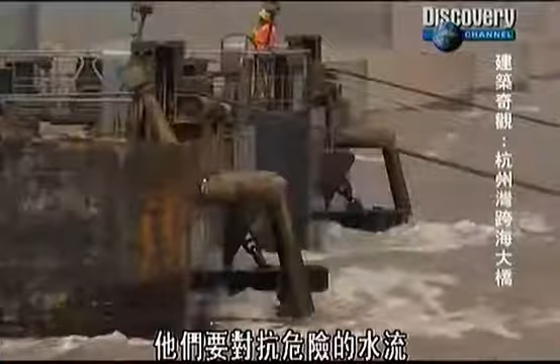These may look like relics of the past, but they are actually the stepping stones to a modern-day marvel. The longest bridge of its kind on Earth, and the team has just 5.5 years to build it. They'll have to battle dangerous currents, winds in excess of 170 kilometers an hour, and take on the Silver Dragon. To make the construction even more difficult, this bridge isn't spanning a river, it's spanning an ocean.

China's Hangzhou Bay Bridge is the ultimate design and engineering challenge. A monster project with monster machines, and a construction zone like no other. If they succeed, it will be a man-made marvel. The dream, to bring two of China's busiest cities closer together. The two cities sit on either side of the Hangzhou Bay, a giant gulf in the East China Sea.

On the south side of the bay lies Ningbo Port, the second busiest in China, with a handling capacity of more than 100 million tons. 350 kilometers away is Shanghai, the economic and financial hub of China, growing faster than any other city on the planet. Ningbo's future as an international shipping center will be fast-tracked if it can be linked to this dynamic and thriving metropolis.

To make the dream a reality, engineers are designing the world's longest transoceanic bridge across Hangzhou Bay. The 6-lane bridge will cut the distance between Ningbo and Shanghai by more than 120 kilometers. But between these two mighty urban centers lies a vast stretch of ocean that until now has been beyond the reach of bridge builders.

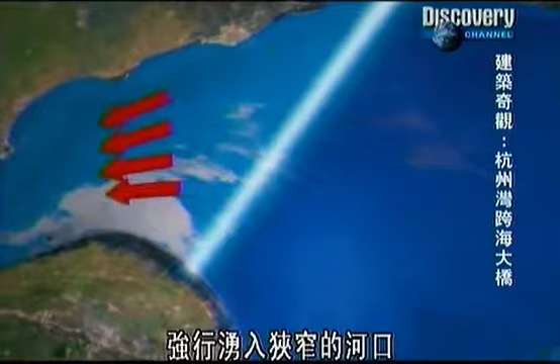At a total cost of nearly 12 billion yuan, the bridge represents the future of the region's economy. But a freak force of nature could see the dream over before it's even begun. Hangzhou Bay is home to the Qiantang River tidal bore, a giant wall of water that forms when extreme high tides, carried on the strong currents from the bay, force their way into the narrow river mouth. The power of this water is so great, it causes the river to flow backwards and produce the giant wave. The Hangzhou Bay tidal bore is known as Silver Dragon, and every year, in the middle of the 8th lunar month, it wakes up.

Reaching speeds of 40 kilometers an hour and heights of up to 9 meters, it's the largest and most spectacular bore in the world. And every year, hundreds of thousands of tourists come for a front row seat. But this natural wonder is unpredictable and dangerous. To date, the mighty dragon has claimed the lives of at least 100 people. And this remarkable phenomenon could claim the bridge before it's even started. In a bizarre twist, it's not a case of if the bridge can survive the dragon, but can the dragon survive the bridge?

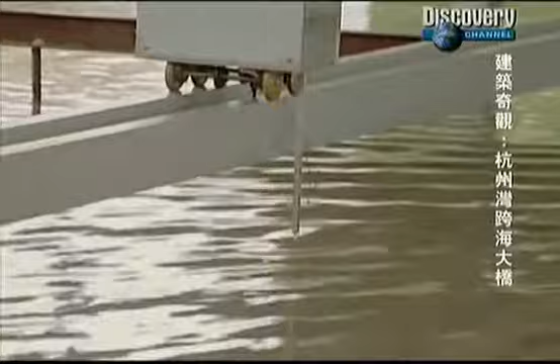Before the designers can begin, hydrologists need to know what they are dealing with. The bridge could alter the flow of water through the bay, destroying the Silver Dragon and a multi-million-dollar tourist attraction. They undertake extensive studies of the Qiantang River's flow, as well as the tides and currents in the bay, then replicate these findings with a scale model of the bay, complete with a prototype of the bridge. The current for the model and the actual current are very similar. The experiments give us results on the effect of the tide and direction of water flow. From these experiments, Jiang works out exactly where the foundations must go to minimize the bridge's effect on the currents.

The result is a bridge in harmony with the currents. 36 kilometers long, winding out in a giant S shape across Hangzhou Bay. This will enable the water to run smoothly under the bridge, minimizing the impact on the hydrology and the tidal bore. The S shape won't interfere with the yearly dragon tide, and it will have another life-saving benefit.

If you make a straight bridge, a long bridge, all the driver sees is a black tarmac in front of him. And that can be quite monotonous. In fact, it can be downright dangerous because of sheer boredom of driving a long length. After 10 years of planning and more than 50 separate studies on environmental conditions, the design is complete. The world's longest transoceanic bridge gets the go-ahead.

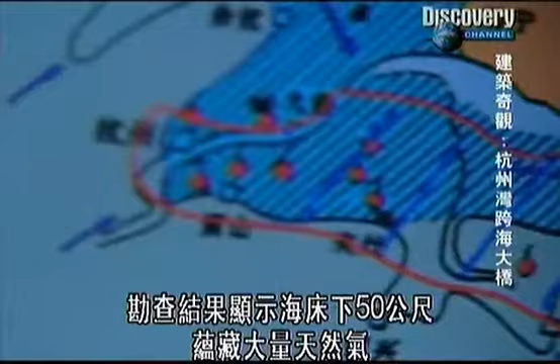But constructing a 36-kilometer-long bridge across this turbulent sea won't be easy. Before construction even begins, the team finds out that Hangzhou Bay harbors an explosive secret that threatens the future of the bridge. Surveys reveal large natural gas deposits 50 meters under the ocean floor, right in the path of the bridge. When planning the bridge, we never considered the possibility there would be natural gas here.

The bridge design calls for thousands of steel piles to be driven almost 80 meters down into the sediment. But with a minefield of natural gas below the seabed, it's a recipe for disaster. My first reaction was maybe this was not a suitable location to build a bridge. Driving piles into the gas deposit is extremely hazardous. The uncontrolled eruption of gas could undermine the bridge's foundation.

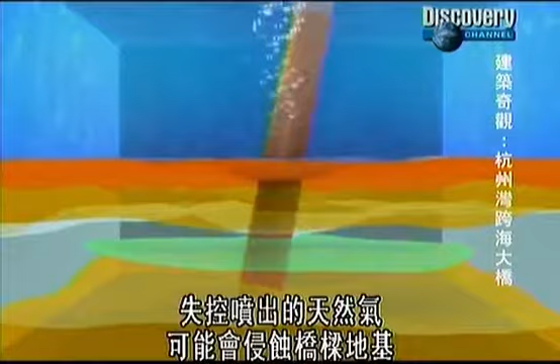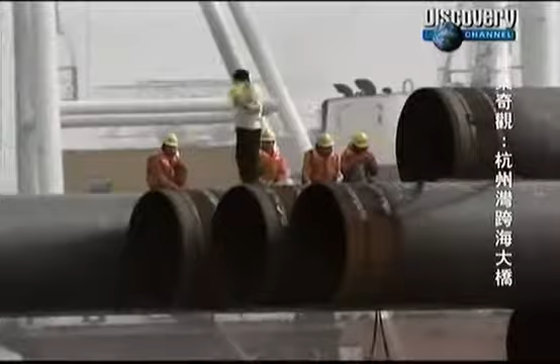A stray spark could ignite the gas and fuel a catastrophic explosion. Each time the team drives in a pile, it could spell disaster. Construction is put on hold until they can find a solution. We were very worried. If, say, the natural gas problem couldn't be overcome, it would then bring harm to our construction and also the lifetime of the bridge.

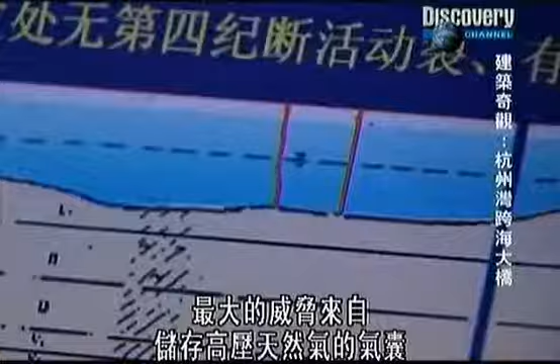The greatest threat comes from pockets of gas that are stored at the highest pressure. These pockets can pop like a balloon, erupting with devastating force. But after careful analysis of the gas field and consultation with leading experts, engineers come up with a solution. We call it controlled gas release. We pick the most concentrated areas of the gas. Then we drill holes down there, releasing the gas.

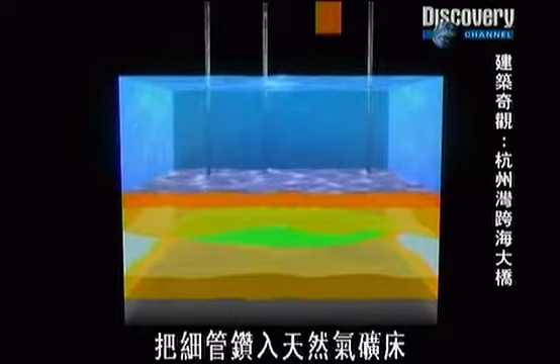Small pipes are drilled into the gas deposit and fitted with pressure valves. The gas is slowly released until the pressure is low enough that the gas no longer poses a risk to the bridge. It's an ingenious solution that enables the engineers to go through the minefield, not around it. And the project is back on its feet.

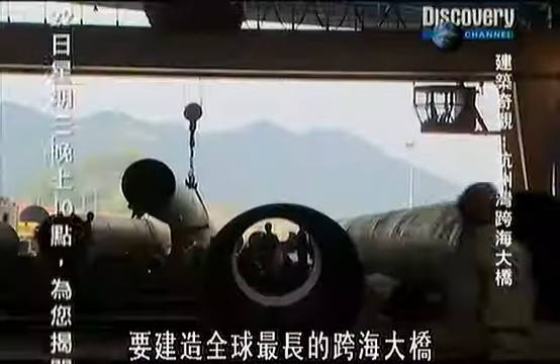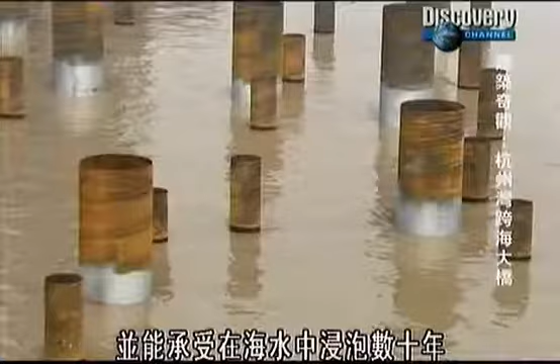To build the world's longest transoceanic bridge, they must first drive 6,000 steel piles into the seafloor. For the foundations of the bridge, we mainly depend on the steel piles. The steel piles for the bridge foundations are not replaceable. Each pile must stand up to being hammered 80 meters into the rocky seabed and endure decades of exposure to salt water. It's a tall order, and there's no room for failure.

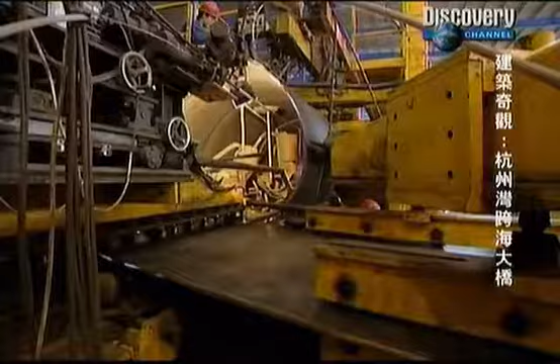To ensure success, they decide to custom build special factories near the construction site to make these extraordinary piles. Here, sheets of steel, 22 millimeters thick, are rolled into giant tubes, 1.5 meters wide and almost 90 meters long. Each tube is arc welded twice as it forms. First from the inside and then from the outside. They use a special copper-plated alloy to weld the steel together.

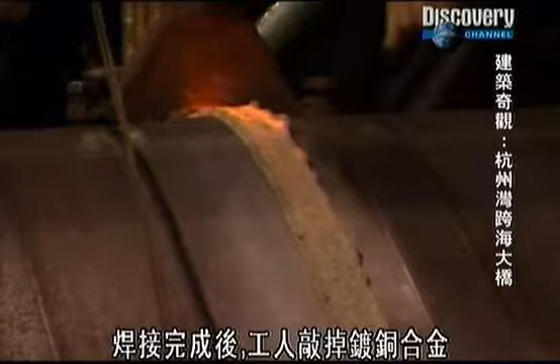Copper is a good conductor. It increases the temperature of the welding wire. When finished, the copper simply cracks off. Weighing in at close to 70 tons, each colossal pile takes 40 minutes to roll and weld. These are the longest and strongest steel piles ever used in a construction project in China.

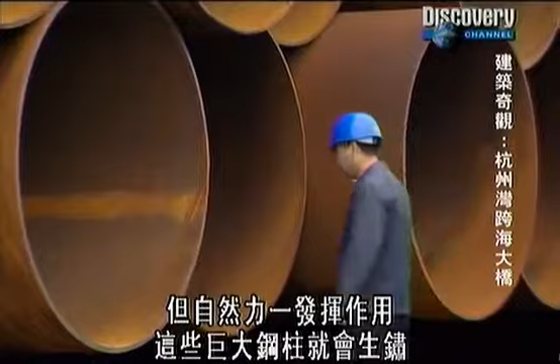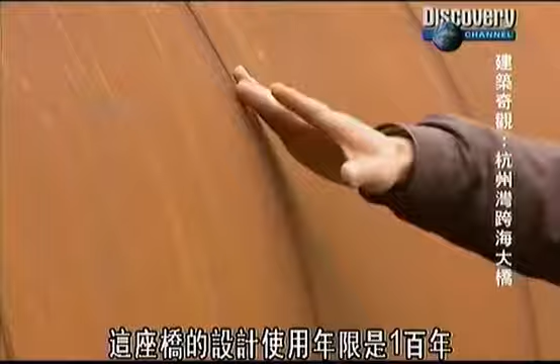But these mighty steel pillars will be reduced to rust and rubble if nature gets its way. The piles stored on shore are rusting before they even make it to the water. For this particular bridge, its design life is 100 years. What that means is the material that we use should be able to last 100 years with the least amount of maintenance and the least amount of inspection.

For the piles to last the test of time, the team must protect the steel from the elements. The process is costly and time-consuming. First, the piles are run through a machine that blasts the rust from their surface. Then they continue into another mammoth machine that coats them with an anti-corrosive preparation called fusion-bonded epoxy.

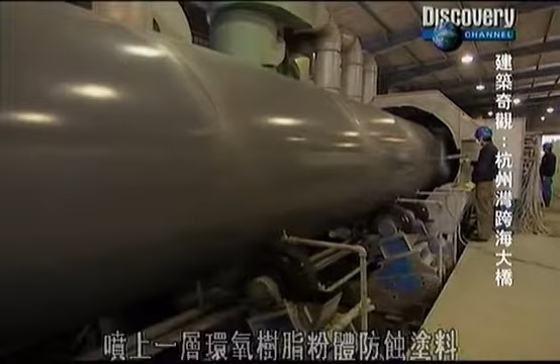To seal in the epoxy, the coating is heated to a sizzling 250 degrees Celsius. The temperature is crucial. Any significant drop and the seal will fail. Workers must constantly check the temperature using infrared sensors. But the team is confident that the piles are now ready for whatever Hangzhou Bay throws at them. The steel piles designed by us will last for 100 years.

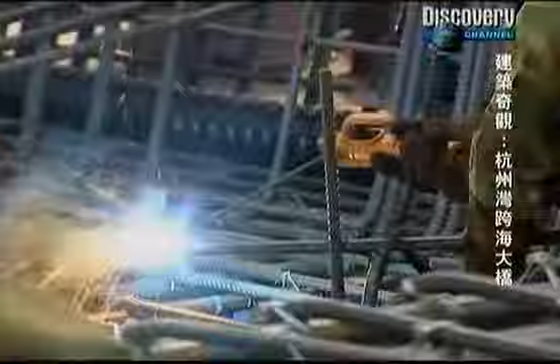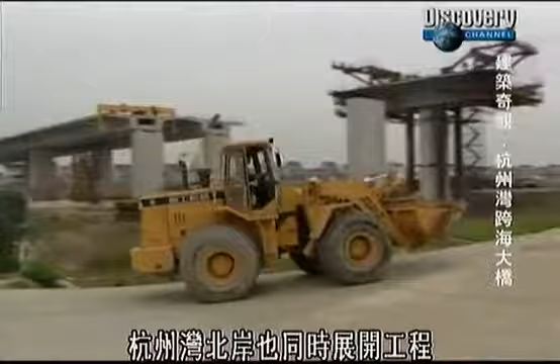To speed construction, the team is building the bridge from the south and north sides of the bay at the same time. These separate stages must join with absolute precision. The placement and alignment of the piles is crucial to success. Traditionally, bridge builders use visual surveying to pinpoint where a pile must go. But with a bridge 36 kilometers long and an environment prone to torrential rain and heavy mist, the engineers will need to find another option.

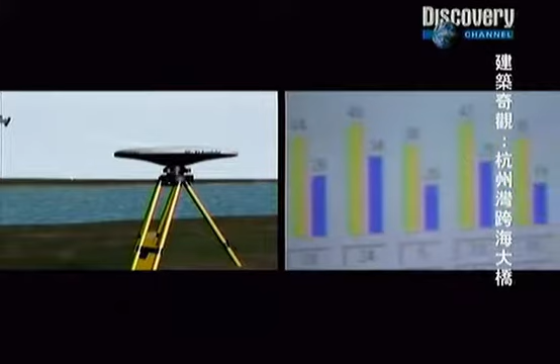GPS, or Global Positioning Systems, use satellites to calculate positions accurate to a matter of centimeters. In the case of the Hangzhou Bay Bridge, GPS reference stations are set up on land. Experts from Trimble Navigation design an integrated GPS system for the bridge builders. Base stations on either side of the bay communicate with orbiting satellites to create a triangulated reference grid. Each pile is given a unique fixed address based on its latitude and longitude. When it's time to place the pile, GPS receivers on the pile driver locate that fixed address.

On the piling barges, they have two GPS, which actually reference to the base station out on the shore. So this piling barge is able to navigate to the pile positions, roughly, and once it gets close to the point, anchor is dropped and it's winched to its exact position. And once it's there, the pile will be dropped. It really revolutionized the way construction work is being carried out, really changed the way we work. With this high-tech GPS system, the two ends of the bridge should meet precisely.

2.5 years after the approval of the design, the first pile is sunk into the sediment. But with thousands of piles still to go, there's no time to waste. To drive 6,000 piles into the seabed, they'll need a massive sledgehammer mounted on a monster ship. This enormous floating pile driver has been purpose-built. The piston drives the pile into the seabed with a force of 250 tons per square meter.

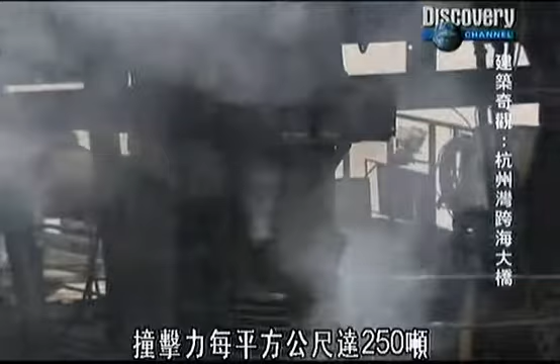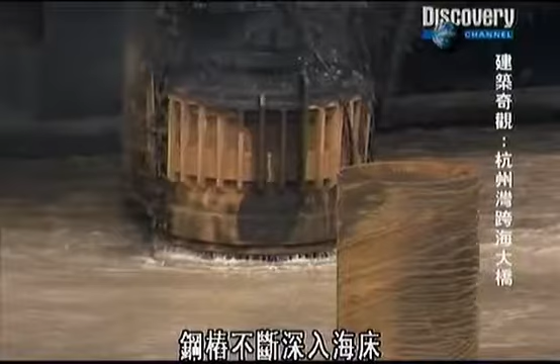With each tremendous impact, the 28-ton hammer rams the pile deeper and deeper into the seabed. It takes more than 2 hours to drive in each giant 90-meter pile. The bridge is starting to take shape. But the piles are only the first phase of the bridge foundation. The team must now construct concrete piers to support the bridge. And once again, the bay's corrosive environment spells trouble.

For bridges of this scale, there are basically two materials, steel and concrete. Concrete, by its very nature, will actually require less maintenance than steel. But concrete also, we have found, does not have durability unless it is done properly. It's not the concrete itself that's vulnerable to the environment. It's what's inside, steel reinforcing.

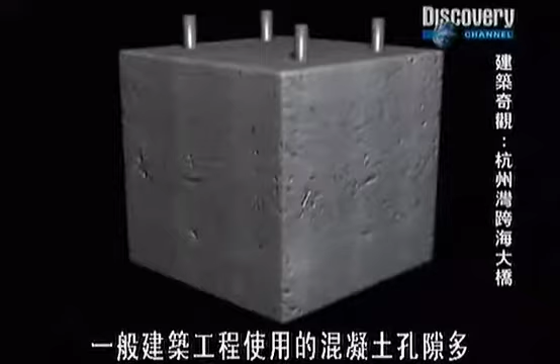Normal construction concrete is quite porous. Water gets in through the pores of the concrete and makes its way to the steel reinforcing. When salt water hits steel, it causes the steel to rust and expand, pressing the metal against the concrete from the inside. Under this increased pressure, the concrete starts to break down and the pier rots from the inside out.

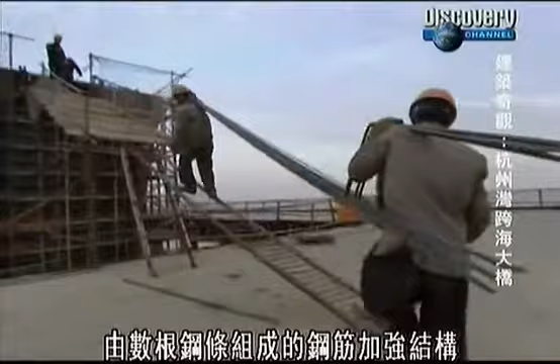The concrete piers on the Hangzhou Bay Bridge are reinforced with multiple steel rods called rebar. To seal thousands of tons of rebar with a protective coating would be too costly. The only solution is to make sure the steel doesn't come in contact with the salt water. The engineers need to develop a stronger, less porous concrete mixture.

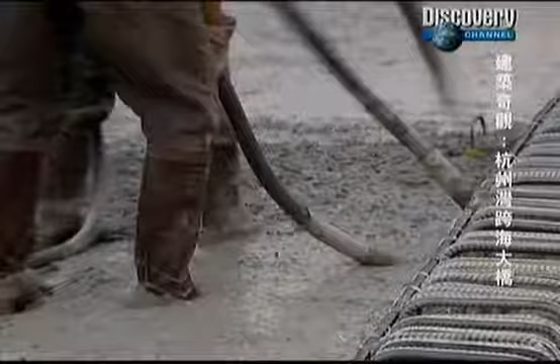When we started, we had no former examples to look back on, so we made thousands of different formulas. We tested them out and picked the best. The exact composition of the oceanic concrete developed for the Hangzhou Bay Bridge is a carefully guarded secret. But engineer Liu Naisheng can reveal one key ingredient.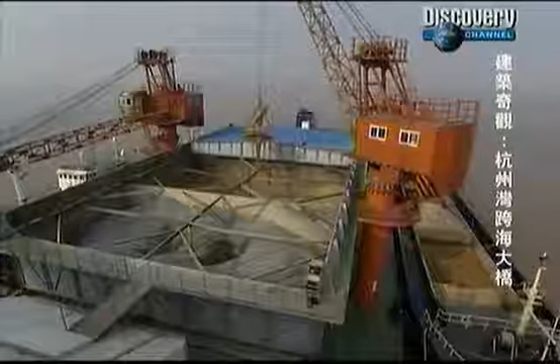We add fly ash to the concrete mix to fill in the spaces and link up the substances. It will increase the strength and enhance the anti-corrosive ability of the concrete. The fly ash is actually a special volcanic ash that they add to the mix. Another key component of this 100-year concrete is a corrosion inhibitor, a chemical compound that slows down any reactions between the salt and the steel.

Getting the right concrete formula took time, but it is well worth the effort. The hours spent in development will pay off tenfold once the bridge is complete. If we use concrete as opposed to steel, that means that the maintenance cost then gets reduced, because concrete by its nature does not need repairs and repainting as you would do with steel.

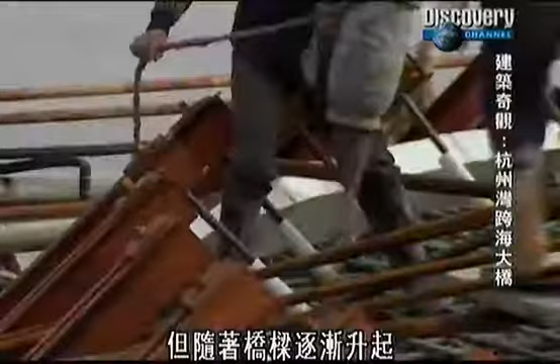Using clever chemistry and trial and error, the team has conquered the elements in the water. But as the bridge rises upward, engineers face another powerful force of nature: typhoons. To bring the prosperity of Shanghai to the port of Ningbo, engineers are constructing a 36-kilometer-long bridge across Hangzhou Bay.

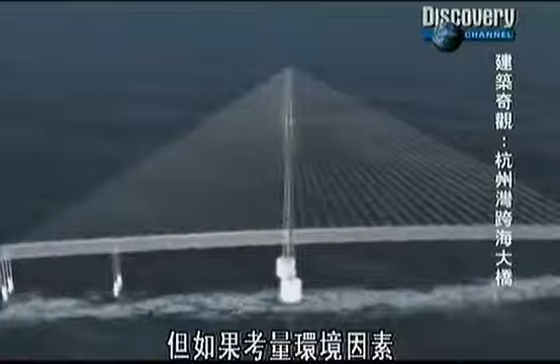For the project to be a success, the huge container ships that use Ningbo port must be able to pass under the bridge. This will require giant spans 450 meters wide and 45 meters high over the deep water shipping lanes. But these towering bridge sections create a whole new set of problems when the environment is factored in. Another major design challenge was to design this bridge, the navigation spans, for typhoon wind conditions.

Hangzhou Bay is home to some of the most violent storms and typhoons on the planet. Since construction for the bridge started in November 2003, a 2-year time span, we have encountered 11 typhoons. Typhoon winds can reach speeds in excess of 170 kilometers an hour, causing extensive damage to everything in their path.

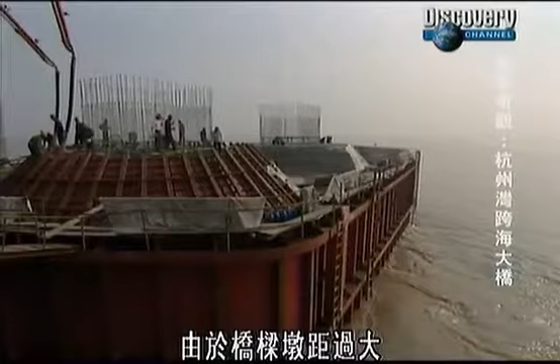The enormous spans needed for container ships to pass under Hangzhou Bay Bridge will be prone to wind. Here, the distance between the piers is so great that the weight of the span must be supported by cables from above. And cable-supported bridges are especially vulnerable in high winds. Cable-supported bridges are very flexible. What that means is that due to wind traveling across them, like an airplane wing, they will tend to oscillate. Wind tunnel testing and other criteria have to be taken into account in designing for wind stability.

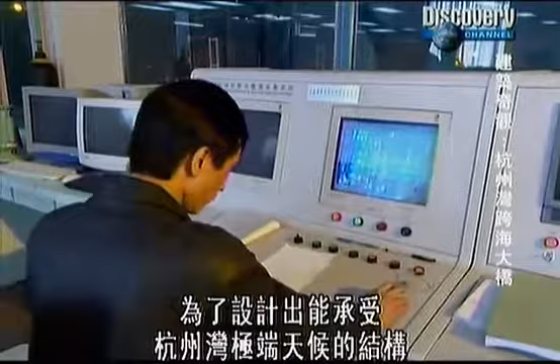To find a design that could stand up to the extreme conditions in the bay, the wind engineers built numerous models of the bridge, then subjected those models to the typhoon-strength winds the real bridge will have to endure. Getting the design right is crucial. If they don't, the results could be devastating.

The Tacoma Bridge in Washington State in the United States is a classic example of what can go wrong. The bridge was nicknamed Galloping Gertie because from the moment it was finished, it was unstable. But in November 1940, high winds hitting the extremely flexible bridge caused a bizarre twisting motion. This unusual pattern grew steadily worse until finally the cables broke and the bridge self-destructed.

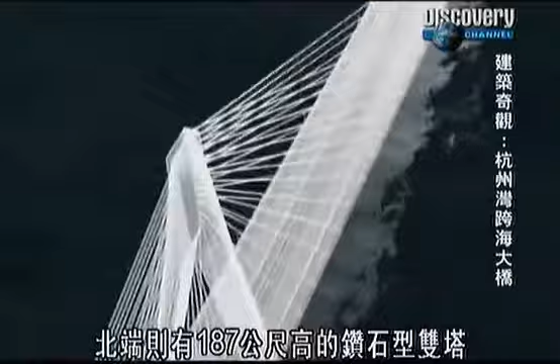That is what we need to ensure will not happen on a bridge. So we make the bridge by shaping its edges and making its shape such that it will be aerodynamically stable. After extensive wind tunnel testing, the engineers come up with their final design: a cable stay system supported by a 202-meter-tall A-shaped tower at the south end of the bridge, and two 187-meter-tall diamond towers at the north end.

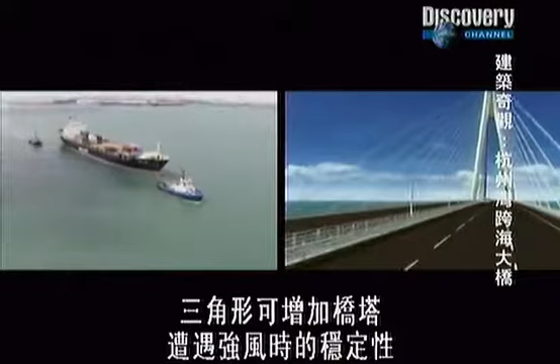The cables will support the giant spans, and a triangular shape will increase the stability of the towers in high winds. The result? Navigation spans stiff enough to resist typhoon-strength winds. But coming up with a design that can stand up to the environment is not the same as building it. High above the raging currents of Hangzhou Bay, the workers at the bridge must battle the extreme elements every day. It's not work for the faint-hearted.

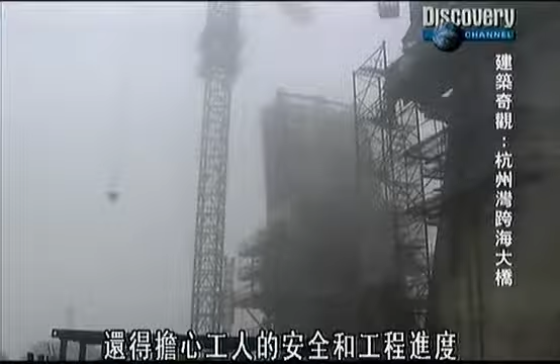The workers need to overcome a frightened state of mind. Most of our workers hired to work around these parts have no experience of working near the sea and have never experienced typhoons before. It's not just the workers' state of mind that concerns the team. Workers' safety and the completion of the project are in jeopardy.

The construction program is 5.5 years long. That may seem reasonable, but every year the weather window suitable for construction is only around 200 days. So just to think we have to squeeze all construction activities into 200 days a year, that is a great challenge. The team has to take decisive action to ensure the safety of the workers and keep the project on schedule. Because when severe conditions take hold, work at sea comes to a halt.

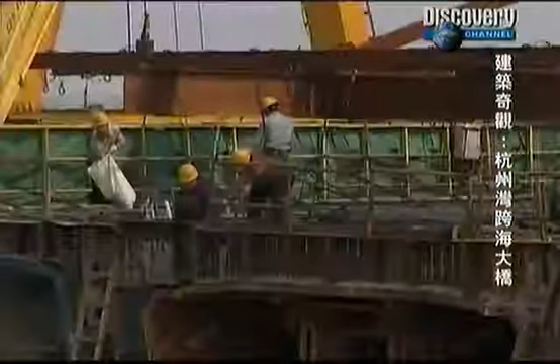They come up with an ambitious plan. If it succeeds, it will create a safe work environment and keep the project on track. The plan? To build the world's longest sea bridge on land. Once we move the fabrication process and build the bridge on ground, so to speak, and try to find a way to erect it up there in the air, we would have removed a lot of headache, and we're also less prone to the forces, the elements of nature.

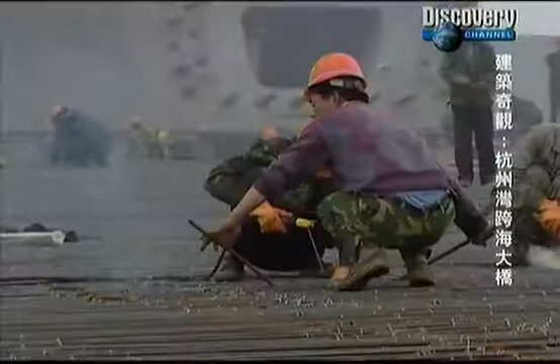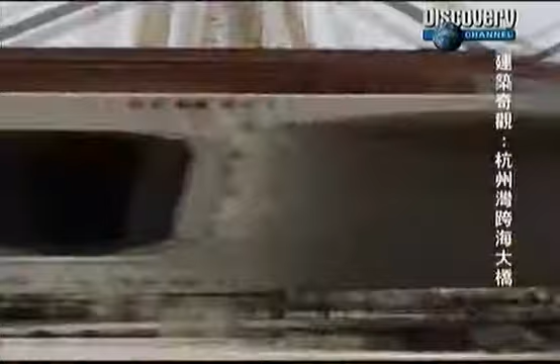When severe weather conditions halt construction at sea, prefabrication can still take place on shore. Vast prefabrication factories, stretching as far as the eye can see, are set up on both sides of the bay. These manufacture the giant girders required for the construction. What that means is that you get really good quality product built in factory conditions, under controlled conditions. They can be made in large segments, then be brought to site and then assembled.

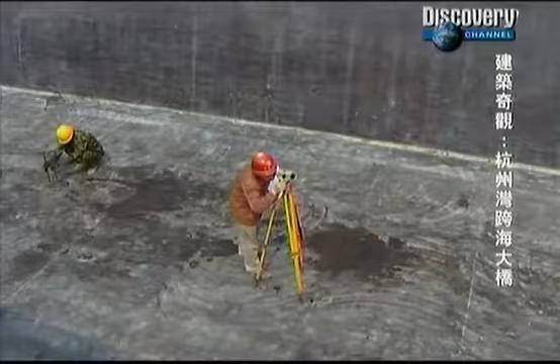Traditionally, prefabricated girders are made in a series of pieces and are assembled together at the bridge site. But to reduce the time at sea, engineers use a clever technique on a scale never attempted before. The giant girders will be cast in a single mold. The technique has been used previously. First time it was used was on the Taiwan high-speed railway. But those were much smaller units. But what is interesting here is that this is by far the largest unit in the world.

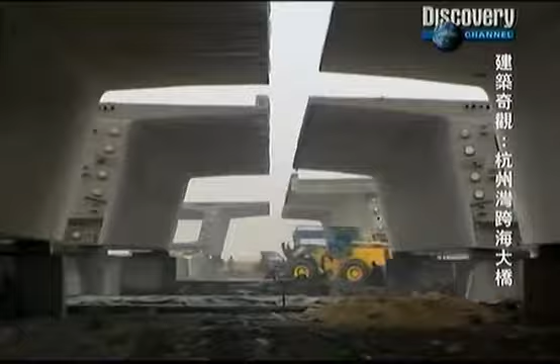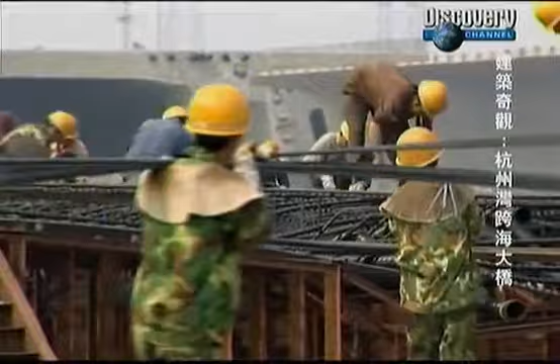These massive girders are up to 70 meters long, 16.5 meters wide, and weigh a staggering 2,200 tons. Lying on top of the piers, they create the tabletop structure which will support the road. To make the largest girders, 200 tons of steel rebar is tied and welded together. It takes 65 workers just under a day to produce one of these massive steel skeletons.

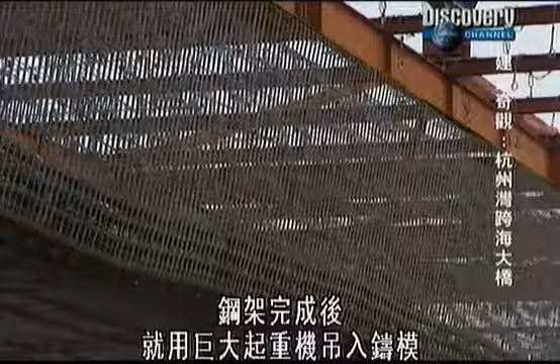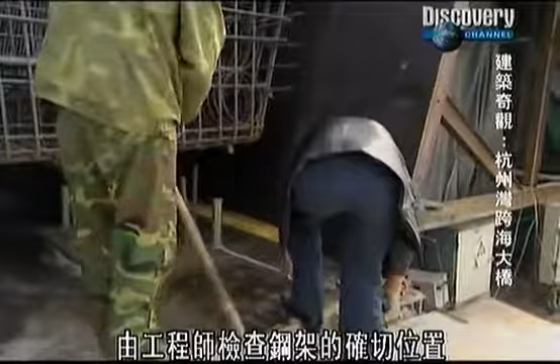Once complete, the steel frame is transferred to the mold using a giant crane. The drive mechanism uses a unique synchronized rotation system, allowing it to turn on a dime. The crane maneuvers into position and carefully lowers the steel frame into the mold. Engineers check the exact positioning of the frame and make final adjustments.

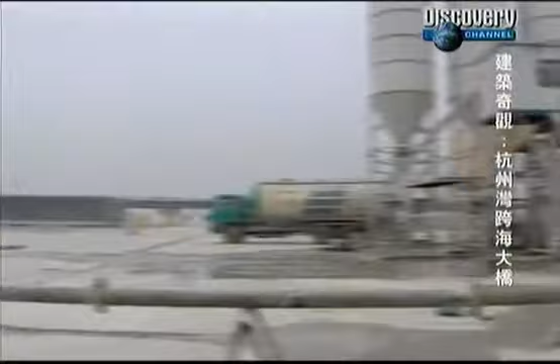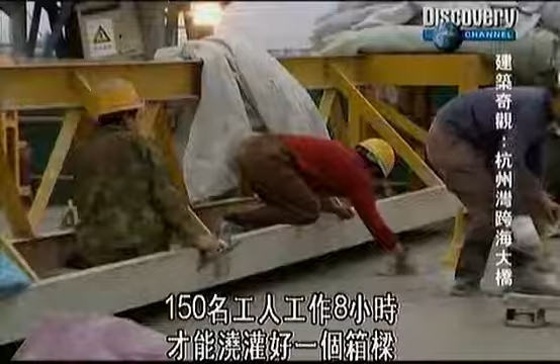Each girder soaks up a whopping 830 cubic meters of concrete. To prevent cracking, they pour the concrete in one go using 4 pumps and a constant supply of concrete. It's an impressive feat of coordination, and takes 150 workers 8 hours to cast one girder. It's going to take over 1,000 prefabricated girders to complete the 36-kilometer-long Hangzhou Bay Bridge. But building the bridge will require moving these giant jigsaw pieces out to sea. It's an engineering obstacle course, and to succeed, the team will have to take bridge building technology to a whole new level.

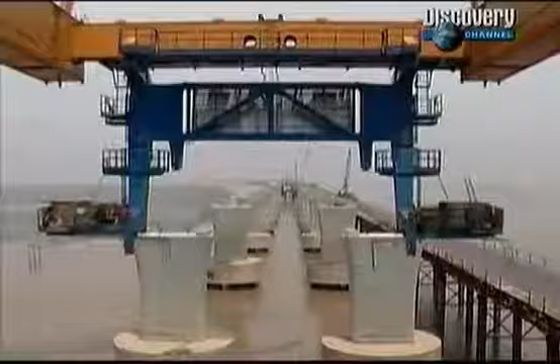Building the world's longest transoceanic bridge across China's Hangzhou Bay is a monumental task. To overcome extreme weather and complete the bridge on time, the construction team have developed some radical solutions, including building the enormous girders on land. But weighing in at a colossal 2,200 tons, the girders are the Goliaths of the prefabrication process. Moving them from the factory to the construction front will be a logistical nightmare.

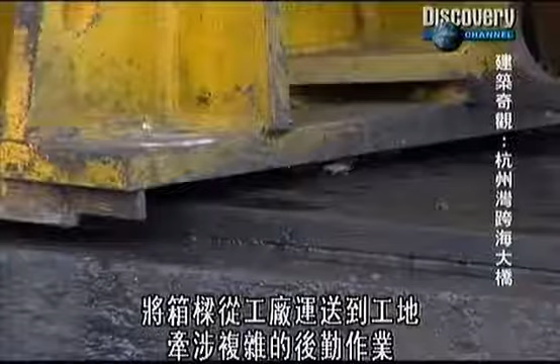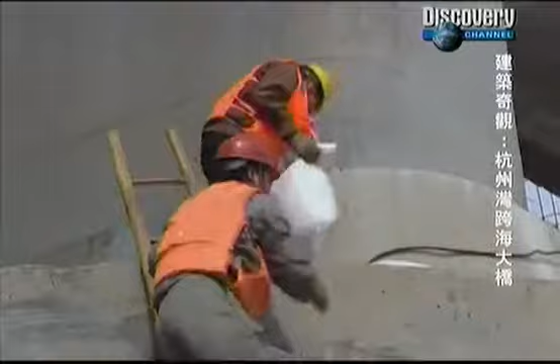Deep water on the north side of the bay means that construction materials can only be transported to the work front by boat. For the workers and their supplies, this doesn't present a major problem. But to transport the giant girders, they're going to need some truly awesome lifting power. This mighty machine must be able to position the enormous girders accurately onto the 40-meter-high piers, while coping with the swift currents of Hangzhou Bay. The answer? The Tianyi, a giant floating crane powered by a 4,800 horsepower engine.

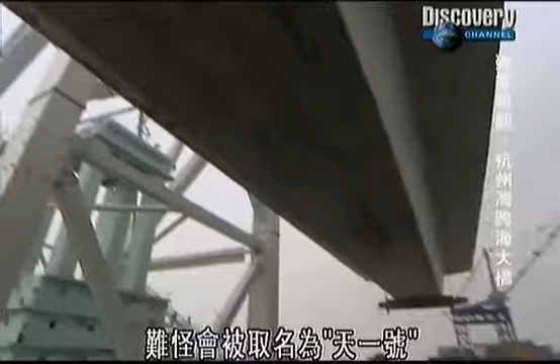Tianyi means number one in the world. At 93 meters long and with a displacement of 11,000 tons, it's easy to see why she got the name. The capacity of this machine can reach 3,000 tons. The lifting height can reach 53 meters. She will need every ounce of her incredible size and power as she takes on the bay.

As the Tianyi carries the girder out to sea, the mists create a false sense of calm. But beneath the surface of the water, the battle has already begun. Extremely swift currents rip through Hangzhou Bay, the fastest reaching a staggering 5 meters per second. At that speed, a boat has to do almost 10 knots just to maintain its position. Even the fishermen who call the bay home struggle with the fast-moving water that changes direction with every tide.

In my opinion, the biggest challenge is overcoming the fast currents. If you take a boat to the fast current zone, after you've seen the current, you would feel quite scared.

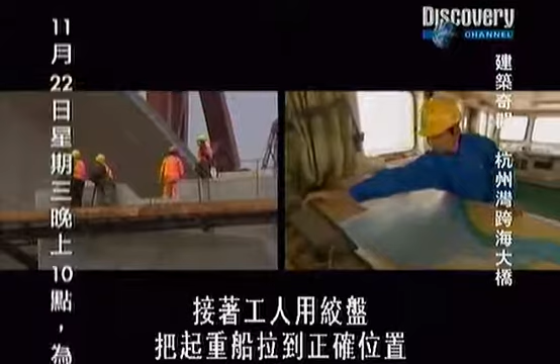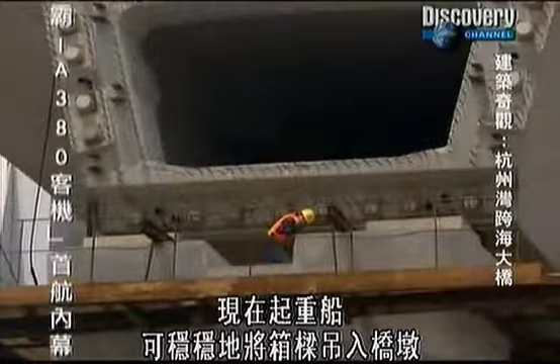Out in the bay, the crew struggles to maneuver the giant ship into place. The rapidly moving water is a real menace when the girders must be lifted up and onto the piers with millimeter accuracy. Anchors hold the Tianyi in place. Then the crew winch the ship to the exact position. The crane can now lower the girders safely onto the piers. Once in place, the workers release the cables from the girder, freeing the Tianyi.

But the Tianyi can't be used on the other side of the bay. On the south shore, the water's too shallow. Tidal mudflats extend for 70 kilometers along the coast and 10 kilometers out to sea. At low tide, virtually nothing can move in this quagmire, except the odd clam harvester. Even at high tide, the mudflats are a no-entry zone for large construction. The team can't afford to get bogged down at this stage. They'll have to come up with a creative solution.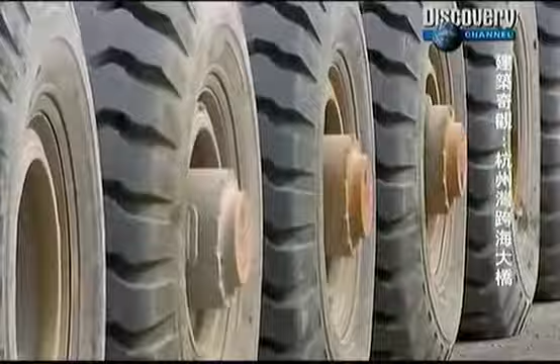Once again, the engineers rise to the challenge. To install the enormous girders, the team develop a specialized truck, stronger than anything that has come before, and a machine that defies gravity. And it all starts with a whole lot of wheels.

The TE 1600 is a 640-wheeled vehicle specially designed to carry the giant girders from the factory to the construction front. By carrying the 1,430-ton girders, this machine broke the world record. Before, the record for the world's heaviest transported girder was a 900-ton girder in Italy.

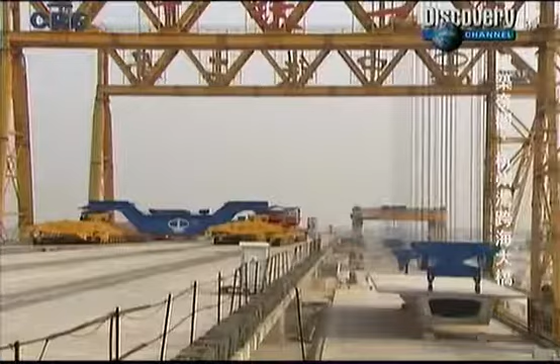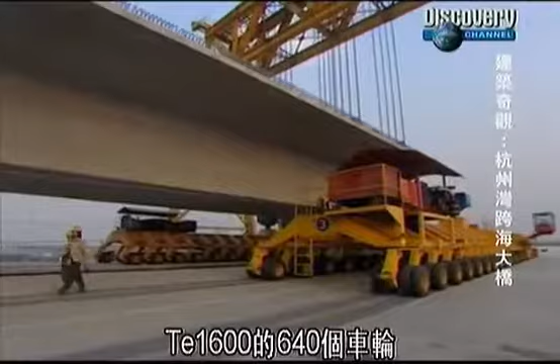To achieve this record-breaking task, the TE 1600's 640 wheels are spread over 4 separate vehicles. Joined at the front and back by giant support beams, each vehicle has 160 wheels arranged into groups of 4. The load on each wheel group is automatically adjusted through an integrated hydraulic system to ensure that the weight is evenly distributed at all times.

If a tire pops, other tires next to it can share its weight capacity, so it won't cause the whole vehicle to tip over. This is very important, as the TE 1600 uses the unfinished bridge as an access road across the mudflats. If the girder were to fall off here, it would be stuck in the mud forever.

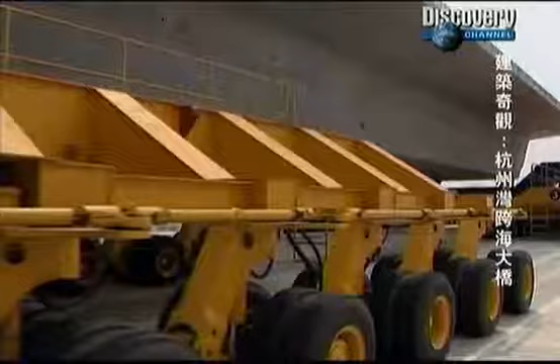Although separate, the 4 vehicles drive as a single rigid unit. Multiple sensors relay information to onboard computers. The computers use this information to adjust the speed and angle of each of the 160 wheel groups to ensure the 4 parts work as one. The TE 1600 can reach a top speed of 4 kilometers an hour when fully loaded. At that speed, it's not going to win any races. But this slow and steady mechanical millipede is set to revolutionize the building of long-span bridges.

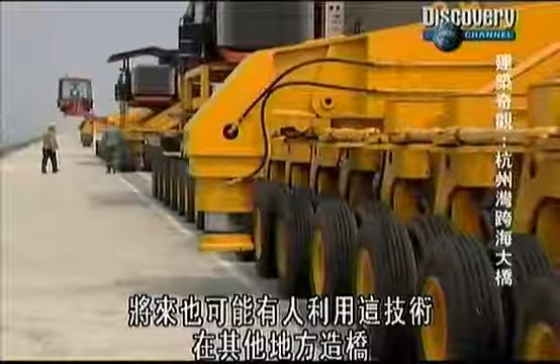This particular design is unique to this particular bridge. And I have to hand it to them. They have done it, and other people will probably use this technique elsewhere for other bridges. But this monster millipede will need an equally impressive partner if the mudflats are to be conquered completely. And that's when the next machine steps in, or rather, steps out.

The LGV 1600 literally walks on thin air to install the girders. Once the girder walker reaches the distant pier, the rear movable leg rolls to the end of the previously installed section. And the front movable leg rolls across the open span. The lifting winches move to the front to balance the walker. And the back leg lifts up. The millipede enters with its load. The back section of the millipede drives forward.

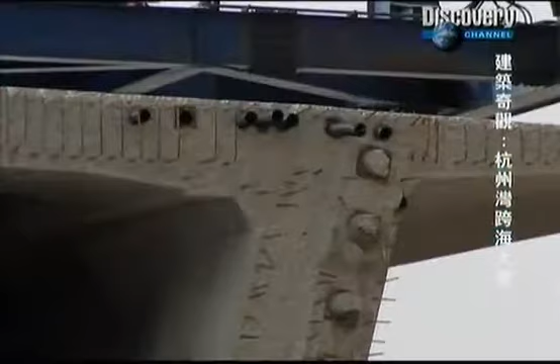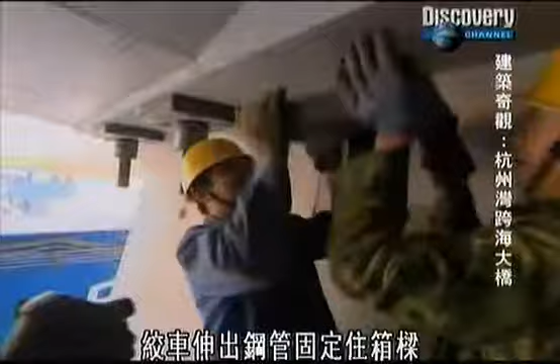The rear leg of the walker folds down, and the winches move back to pick up the girder. Steel rods from the winches are secured to the girder. Once in place, the girder is lifted off the millipede and carried to the front section of the girder walker.

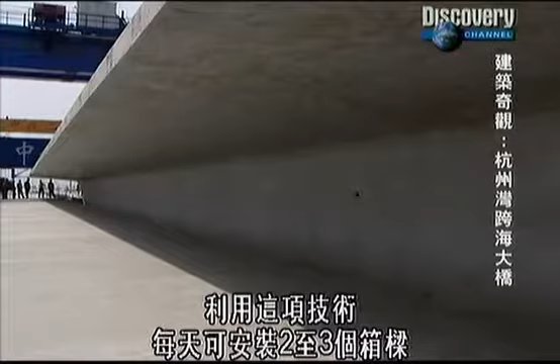Now that the weight is distributed to the front again, the back leg lifts up. The millipede drives off to get another load. And the existing girder is lowered into place. Using this technique, they can install 2 to 3 girders each day. And slowly but surely, one span at a time, they will bridge the giant mudflats.

After 3 grueling years, the piles are all in place. Most of the piers are complete. And as the girders are positioned, the bridge begins to reveal itself. As an engineer, I can visualize the bridge. You can see the columns coming up now. You can see that it will be long. The curve of the bridge is there. It virtually disappears into the mist. There's a kind of mystery at the other end of the bridge. You wonder where it's going to land.

But there's still a long way to go before the bridge finally comes together. The team will encounter more typhoons. Winds and currents will pound men and machines. But it will all be worth it if they can finally build the world's longest transoceanic bridge.

Just 3 years into construction, the Hangzhou Bay Transoceanic Bridge is fast on its way into the record books. To conquer the extreme environment, engineers have expanded the scale of existing technology. And when that wasn't enough, they've invented some radically new technologies.

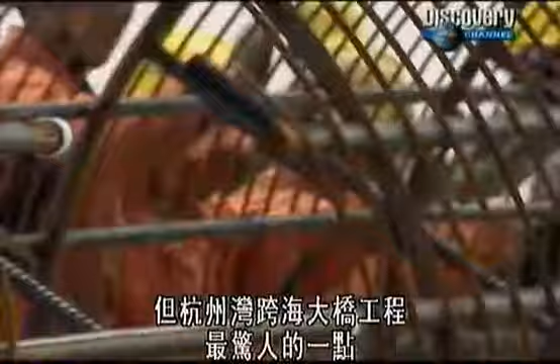But what is perhaps the most amazing aspect of the Hangzhou Bay Bridge project is the speed of the construction. They achieved this by building the large bridge components on land and then transporting them to the construction front. The scale is truly awesome, and the rate of construction nothing short of superhuman.

Finally, the huge northern navigation section, with its twin 187-meter-tall diamond-shaped towers, will be linked to the southern navigation section and its 202-meter-tall A-shaped tower, designed to carry the weight of this wide-span section of the bridge. When the pieces finally come together, the team will have the satisfaction of knowing they have built the world's longest sea-crossing bridge.

Since the bridge started in 2003, I've been on site supervising the construction. In my opinion, it's like raising a child. I, as the parent, am very happy to see it grow daily.

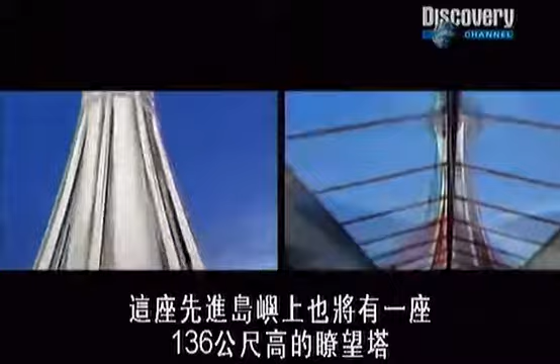36 kilometers of engineering brilliance. And it all culminates in the bridge's crowning glory, a spectacular service island built on a giant platform in the middle of the bay. An architectural masterpiece housing hotels, shops, restaurants, and a world-class conference center. The futuristic island will also feature a 136-meter-high observation tower. Shaped like a giant pearl, the tower will give travelers a bird's-eye view of this monster bridge.

It's the largest bridge project of its kind ever undertaken in China. When complete, 52,000 cars will use the bridge every day. But that figure will grow to nearly 100,000 cars by 2027. Once the bridge is open for traffic, I will definitely drive on it. I want to see for myself that we achieved the objectives set for this bridge.

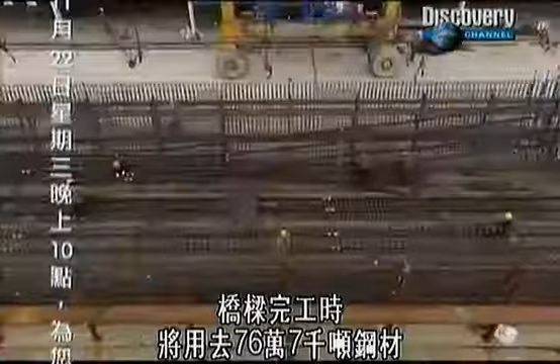When finished, it will have used a phenomenal 767,000 tons of steel and 2,400,000 cubic meters of concrete. The Hangzhou Bay Bridge is scheduled for completion in 2009, just in time for Shanghai's hosting of the World Expo in 2010. If anyone is flying out from Shanghai, they will see this bridge.

It's massive. And it will definitely have a place in the history of bridges as one of the first bridges which has been done of this sort of length. For the millions of people expected to visit Shanghai, the Hangzhou Bay Transoceanic Bridge may well be their first glimpse of China and one of its man-made marvels.